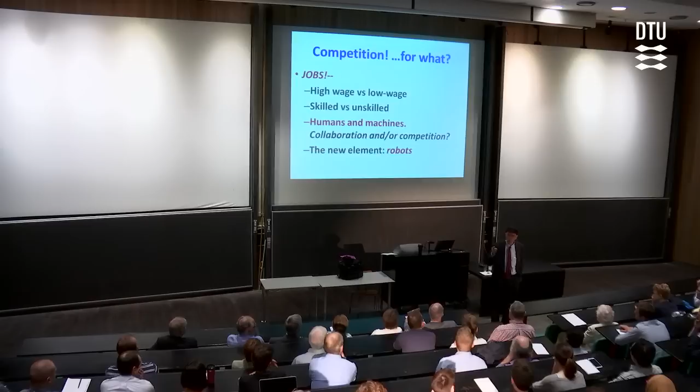And so the new element in this is robots. Robots are not just machines that operate on an assembly line. We humans are in the process of constructing a peer competitor, which is robots, machines able to do things that we can't do with artificial intelligence systems. They may look at us as meat-based intelligence systems and inferior in that way, but artificial intelligence systems may be at least as competent as we are in many of the things that we do. So it's an interesting problem.

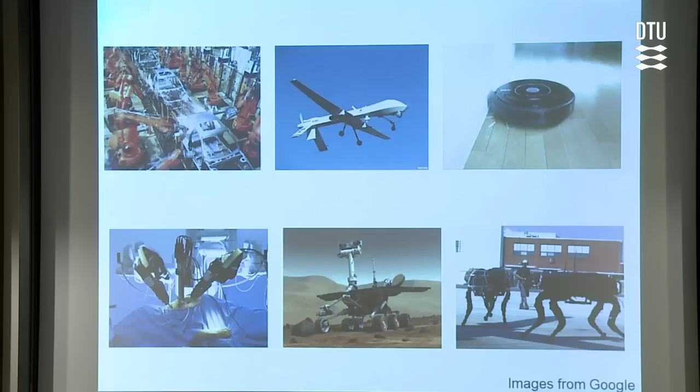Here are robots, and you're familiar with all of these in one fashion or another. There are just a couple of points I want to make about them. This is an assembly line, and these are robots involved in the assembly. The characteristic of these systems is that you cannot come anywhere near them. There's a fence you don't see around this, but when one of these arms swings, it's accustomed to holding an automobile, and if you happen to be in the way, it goes through you as if you weren't there and doesn't even notice. So these are decidedly not collaborative.

The military has, of course, been very good at drones, and a drone is just an airborne robot. This is an effort to make a consumer robot, the so-called Roomba, which is an exceedingly stupid and inefficient way of trying to sweep the floor. This is a picture of the so-called Da Vinci surgical robot, which may or may not give better surgery, but it certainly enables higher billing. So it's a good thing in a capitalist universe.

This is a robot which is of entirely legitimate use. Human beings cannot presently go here, and I'm going to show you a little bit more about the equivalent of this in just a second. But I want to make this point before we begin, and this has to do with the question of whether robots are intrinsically a bad idea.

I would point to early robots, otherwise known as machines, otherwise known as dishwashers and washing machines, which took half of the population, otherwise known as women, and released them from the task of washing dirty diapers and dirty dishes, and made them into teachers and CEOs and whatever they might be. So this was a case in which machines didn't compete but cooperated. They eliminated an unattractive job and replaced it with much more interesting and attractive jobs. So it can be good. It's a question of how you use these machines and how clever we are.

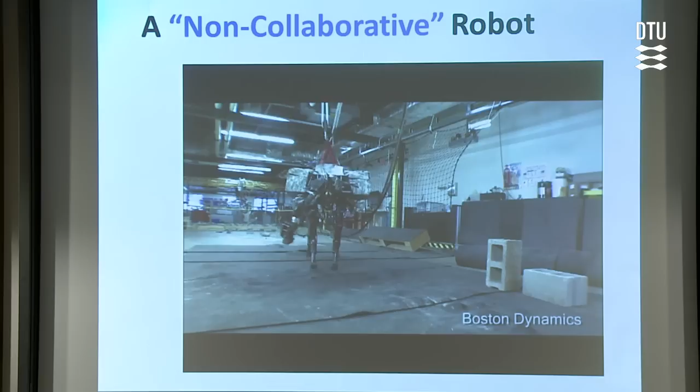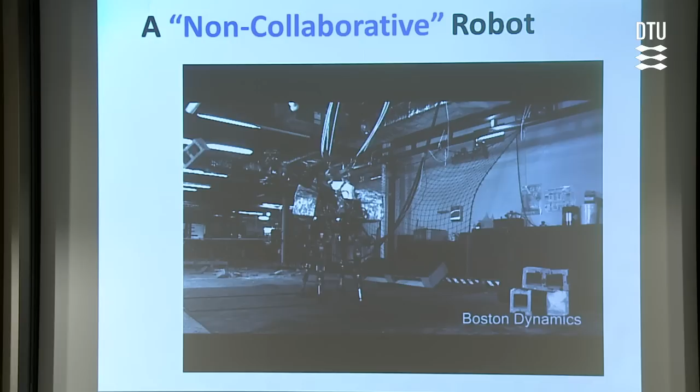But there's a point here that I want you to look at carefully. Look at the grace with which this thing balances, shifts its weight. It's just unbelievable. With my cataracts, I can't tell whether that's alive or not alive. It, in some ways, is better alive. But the underlying issue is that if you look at that kind of development, remember, that doesn't have a brain. All it has is a series of accelerometers and things of that kind. So without any control systems at all, other than the most primitive feedback loops, it does things that I can't tell are not something an animal does.

Now you take that and you couple it with artificial intelligence, and all of a sudden you begin to see a pathway to something, not next year, but something in the next 50 years that begins to look a lot like us. And there's a deep, really important underlying question here, which is, if a system becomes sufficiently complicated that it has the power of advanced information processors, the knowledge of the web, the ability to move autonomously, the ability in various ways to improve itself, it can arguably be set on a pathway for independent evolution. And I don't know whether this is going to happen, but I don't think it's just a question of trivial machines. It's more interesting than that.

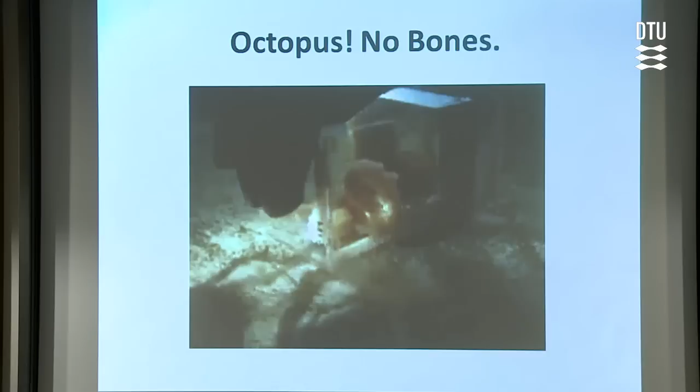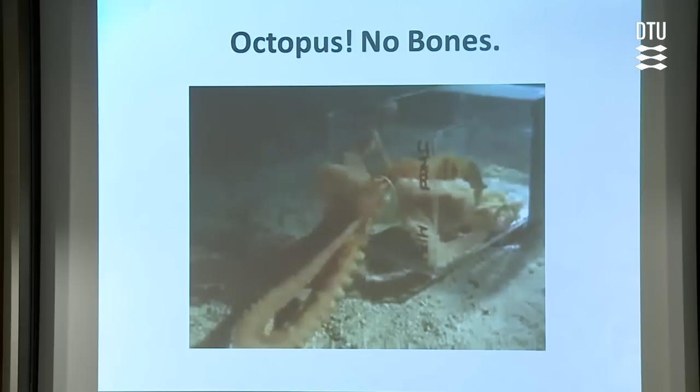Now, to do that, you need always a model, and here is our model. I just think this is among the most fabulous of organisms. This is an octopus, and this octopus is, as you can see, squeezing through a hole much smaller than the octopus, including squeezing its brain, which is apparently pretty plastic.

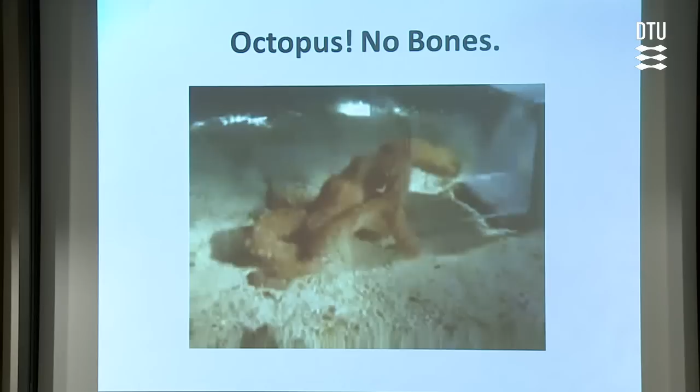I would note that we couldn't do any of that, or at least not without severe damage. So here's something that can do something that we can't do. And once it does it, finally, it's there. Look at that look of intense self-satisfaction.

But this is a model. The point is that the reason I have a skeleton and stuff like this is that I'm designed to withstand the forces of a gravitational field. An octopus doesn't need that because there's effectively no gravity if you're at buoyant density. But there's no real reason why I need that, except for the fact that this was an evolutionary solution. It could be done in other ways.

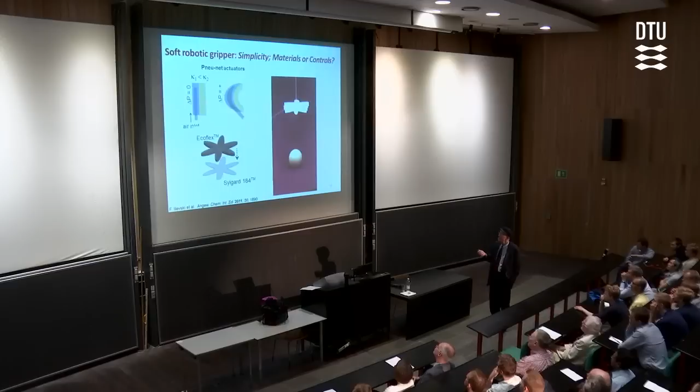And the technology itself is as simple as it could possibly be. It's simply, effectively, a balloon over here, an elastomer with an empty chamber on the inside. You pressurize it, and if there is a layer here that has the characteristic that it can bend but not stretch, as this expands in volume, it causes that to bend. A really trivial idea.

We make this in a straightforward process that I'll show you in a moment. But what's neat is you just pick up this string and lower it, the input line for pneumatic pressure. When this thing wraps itself around, it's very hard to get a hard robot to do it, because you'd need sensors telling you that you're not breaking the crush strength of the shell. But here, because the pressure is distributed uniformly across all the contact area, all you have to do is regulate one pressure, the input pressure, and you're done.

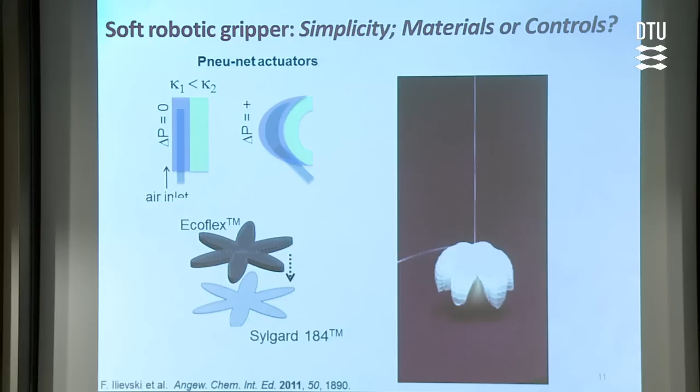It's a first step in something really interesting here, which is that it uses the properties of materials and design to replace complex sensors, feedback loops, and controllers. So it's a device which simplifies the technology.

So how do we make it? A lot of this came out of our work in microfluidics. What we do is simply design a mold, which in our case usually contains a number of small chambers, little bubbles, for a variety of reasons. We print it using a 3D printer. This might take a day for a complex mold.

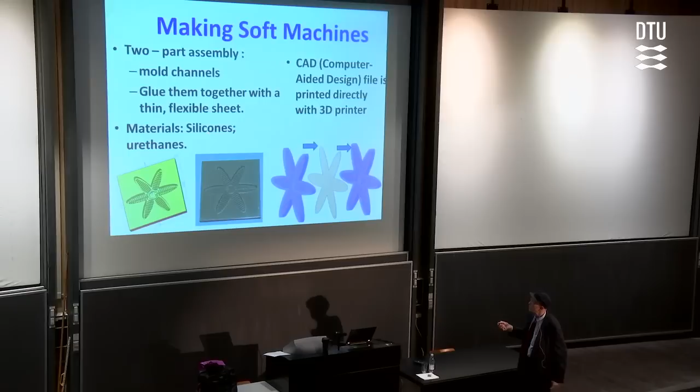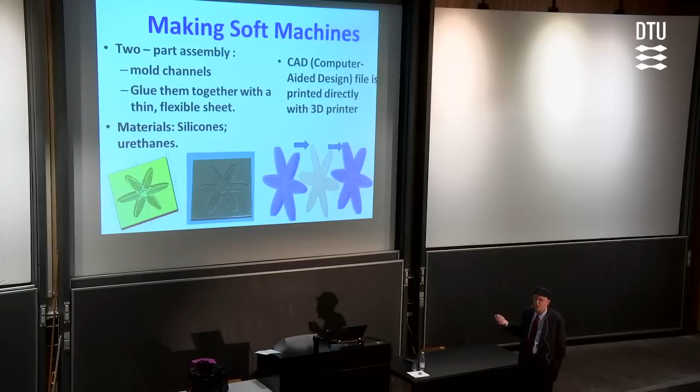But then we mold a flexible silicone rubber against that. We put in some kind of layer that gives us the mechanical properties we want. We glue these together with a bottom on it, and it's done. So it takes essentially no brains to do it. We like things with no brains.

I'm going to come back to that, but I just want to give you a hint of something. First, as this gripper blows up, you can see the little chambers that represent the arm here. But the other thing to look at, something we'll return to, is it starts to curl up from the end even though the pressure is uniform throughout the system. And why does that happen? There's some actually very interesting science associated with that.

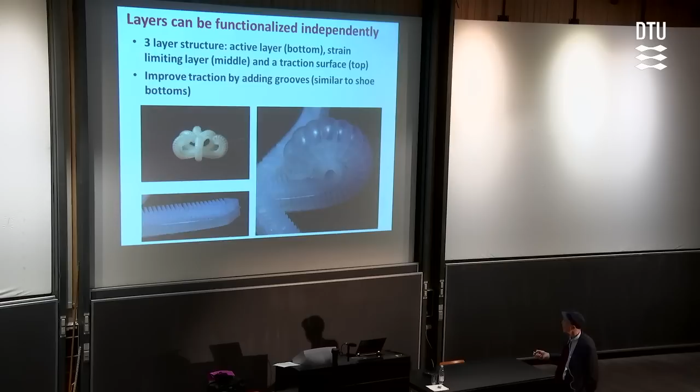It's also easy to take these things and mold internal structures that improve adhesion if you want to do that. It's a very flexible technology.

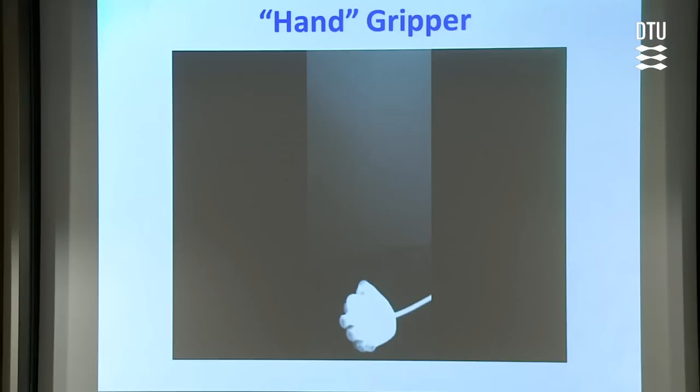Now there are other things that make it interesting, and here's one. This is a related structure, same kind of thing, but now in the shape of a hand. It comes down and grips the egg, and we've made this a little more complicated in terms of internal structure. You can see the fingers are almost articulated, with a joint-like activity. It puts the egg down without crushing it, and that's all fine. It gets its finger stuck there, but not to worry about.

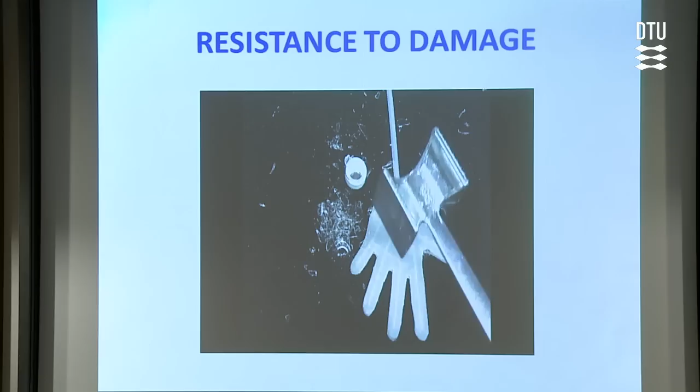But here's the thing that's more interesting—this differentiates it from hard robots. That's a mallet. Ouch. You pound on it, and this would break a small robot of that sort, just to give you a sense that this is real. After you do that, it works just fine. In fact, these are sufficiently light that you can throw them off an arbitrary building, and it doesn't make any difference—they're undamaged. They never reach a velocity that will cause impact damage. So they're essentially unbreakable to most blunt trauma.

They can be cut without much trouble. Hard robots can't be cut, but they're very easily damaged by blunt trauma, unlike these light ones.

And then you can make a whole bunch of other things. Here's something which is a millipede-like object, and here's an example for those of you who like problems—we do this by pressurizing each one of these in turn. How would you make this all work with just one input here? The answer is we don't know right now.

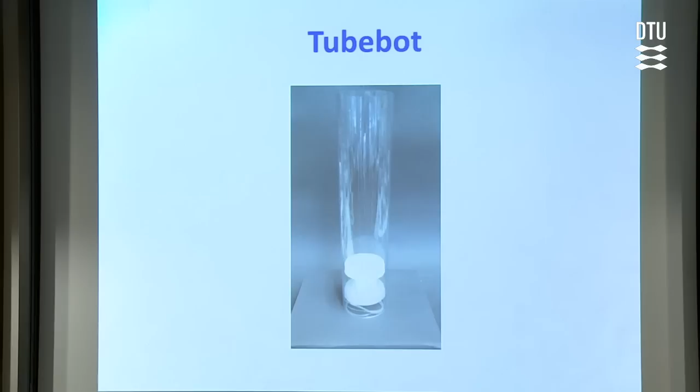Here's another device which enables you to crawl up the inside of a tube, if you want to crawl up the inside of a tube. Perhaps you don't want to, but this is doubtless useful for something—there are people already trying to think about using these to clean out sewers and pipelines and things like that.

Now these are all widgets which are pretty interesting. I want to talk about one bit of mechanics here, involving two components. One is what's called snap-through, which is a bistability—you see that in the little things kids have, a sort of bubble shape you push on and it pops through to the other side. Both are stable, but metastable in either phase. So I want to briefly talk about snap-through and then also about beam buckling. This is much more sophisticated and quite interesting, actually. It's got the mechanics people all excited.

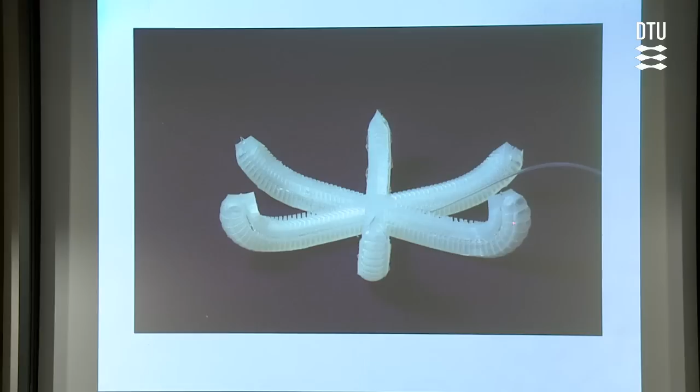So what's going on here? This is an example of snap-through. As you pressurize this structure, the pieces at the end expand all the way before the ones in here do. So you have a system in which you pressurize this entire arm, but because of an instability in the system, the pressurization here leads to curling before the system here curls.

This is, again, an example of using design and materials to get around the problems you'd have with conventional controllers, because trying to achieve a motion of that complexity with electric motors and reels and things of this sort would be a major problem. Here it's just a trivial outcome of the basic design. And all of this, incidentally, you can vary by changing the mechanical properties of the structure and the pneumatic chambers and things of that kind.

Now here's an example of beam buckling. And this was apparently—you can see over here—a heavy lift crane, which I'd suspect somebody got a little more ambitious than they should and picked up something which caused it to buckle at that point.

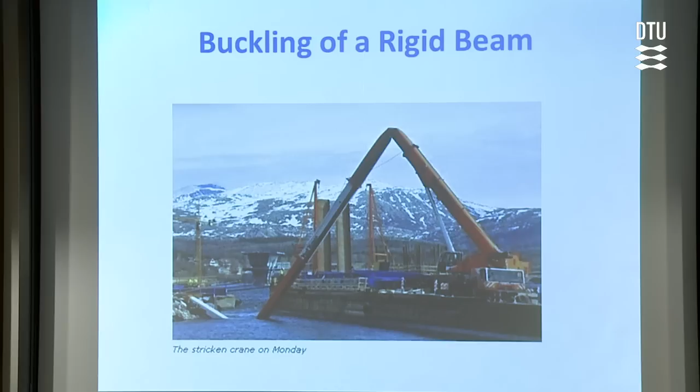What's characteristic of this with a rigid material is once it's buckled, it's failed. You see this in concrete pillars. You push and you push and you push and nothing happens, and then it buckles. And when it's buckled, it's failed.

With elastomers, that doesn't happen. So what we can do now is build structures of this sort. I want you to look at this as having two components. What you see is not two circles, but two ellipses. This and this are the same, this and this are the same. Think about these as being soft beams.

What's going to happen is the following: I'm going to contract them by applying vacuum here. As I apply vacuum, these chambers will shrink. This is an empty space with a thin membrane of PDMS on top of it. As it shrinks, this beam will buckle, but it will buckle reversibly. And amazingly, this internal piece here will rotate. Now, I don't know what's going to happen when I do that.

So let me go back and find this on my computer.

So what you're seeing here is a rotary motion. I've converted the linear motion I showed in other things into a rotary motion. You can begin to do all kinds of interesting things with this.

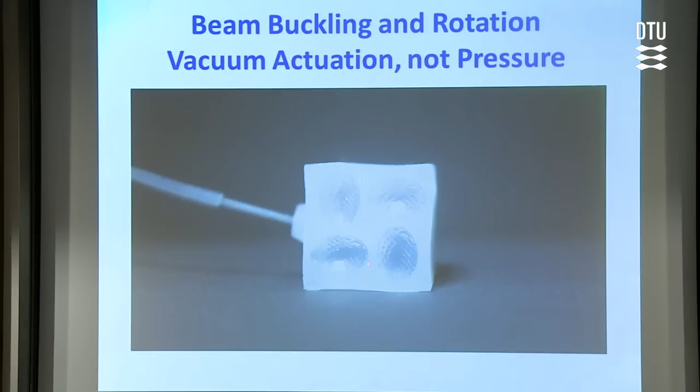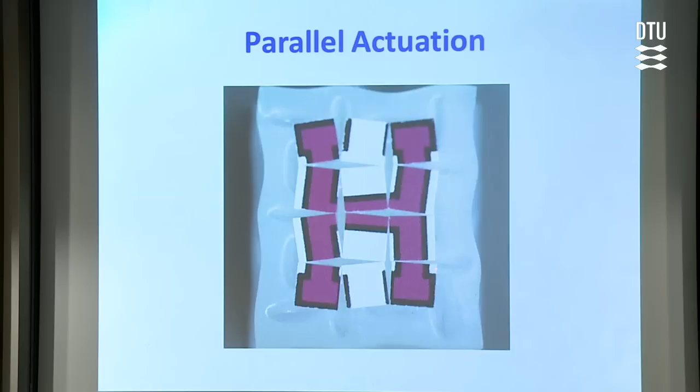I'll show you one here. This is a single input, a single source of vacuum, leading to massively parallel motion, which in this case orients a bunch of disks or plaques. This would be very hard to do in a system as simple as this one if it were hard. So by this kind of beam buckling, it's possible to get to some very interesting structures.

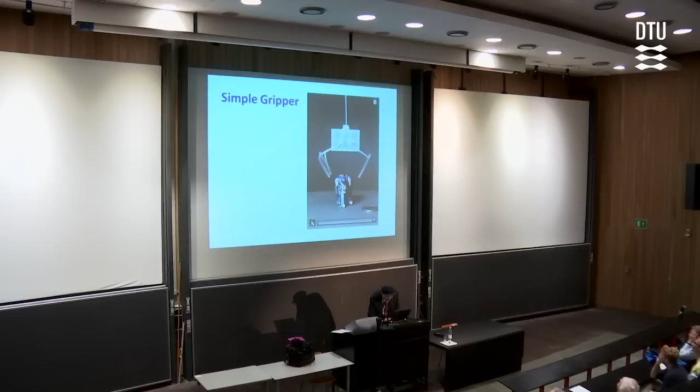Here's another one that again requires this. The reason for pausing on this is that this part is going to rotate in that direction, and this part is going to rotate in that direction, because of the symmetry of this series of holes here with ellipses of different orientation.

And when you do that, with a single vacuum input, this happens: it collapses, grabs, and picks up. So, quite a sophisticated motion for just one pressure.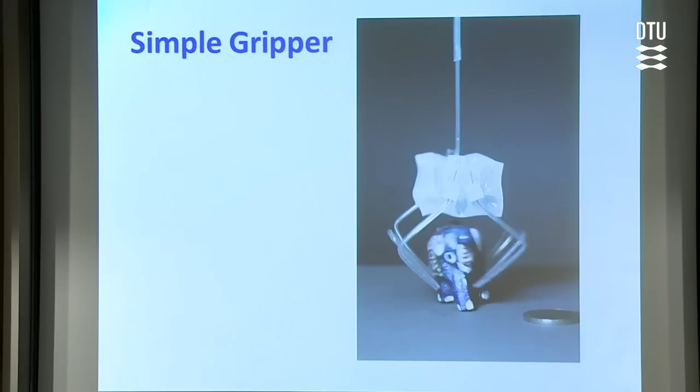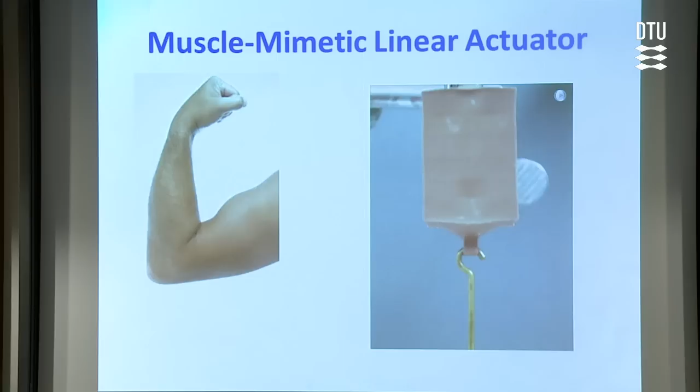So it's intrinsically safe. Now, here's muscle. What I'm going to show you here is our muscle equivalent. I'm really very happy with this kind of thing. You can see the structure — it's the same kind of structure I showed you under negative pressure, that is, vacuum. As the chambers collapse, it contracts this way, but not that way. It's designed for this kind of anisotropic motion.

And here it goes, if I can find my cursor. Where is my cursor? Here we are. So I apply a vacuum, and it lifts a big weight. It does about the same thing that a muscle does at the same volume.

If you pause for a second and look at the structures here — I should have that loop, but that's okay — what they are is a series of beams that are again buckling. The beam connection may be a little unclear, but it can be considered an ensemble of buckling beams.

Now, some examples. This is Josh Lessing's arm with a volleyball, and that's Josh Lessing doing his thing with a volleyball. This is our arm, which does its thing. It's a little slower, but only because on this particular piece we had a thin piece of tubing. And to show it's just a step from here to the Appassionata, it can do a flip.

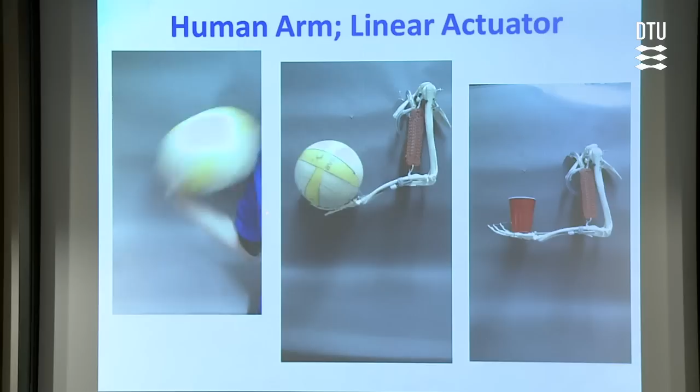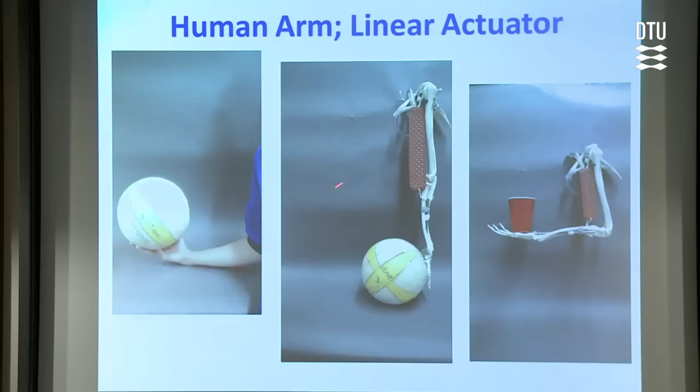Now, applications. I'm a big believer that applications focus the mind, so I'm going to talk about four. One is to show you some work done by a company called Soft Robotics, which was founded on this basis. I want to make a remark about this.

Let me show you the other examples first. I'm going to talk about some further biomimetic structures. I'm going to talk about a topic we're very interested in called 'life that never was'—if you look around, there are certain kinds of motions that creatures use to move, but you could imagine many others, and why aren't they used? It's now easy enough to make models of things so we can examine why some of these alternatives weren't used. The last one is some examples in biomedicine. Let me pause to comment on the first one.

My good friend and ex-student, David Walt, was one of the founders of a company called Illumina. Those of you who are biologists will have heard of Illumina. Illumina makes most of the boxes used for gene sequencing—80% of gene sequencing is done with Illumina sequencers.

I was at a meeting once, and a student raised her hand and said, 'Professor Walt, we know you continue to work on this, and that you're also doing things with proteins—how do you avoid the conflict of interest in your laboratory by having both a company and a laboratory activity?' He said, 'There's no problem.' He's absolutely right. The reason, he says, is that as soon as you hand one of these problems to a company with mature professional engineers, you can never keep up in university. You can't possibly do as well as they do, so you don't bother—when you hand it over, you quit and go do something else with your life.

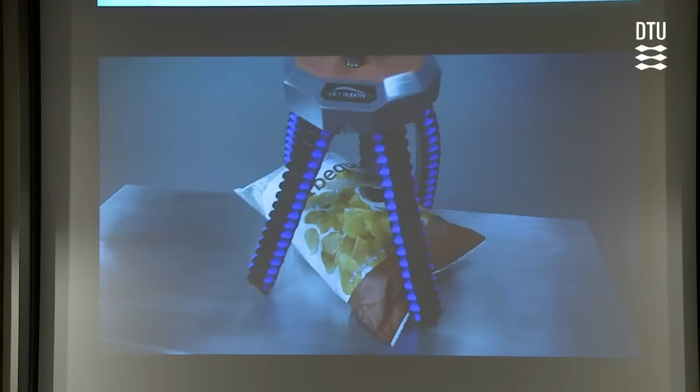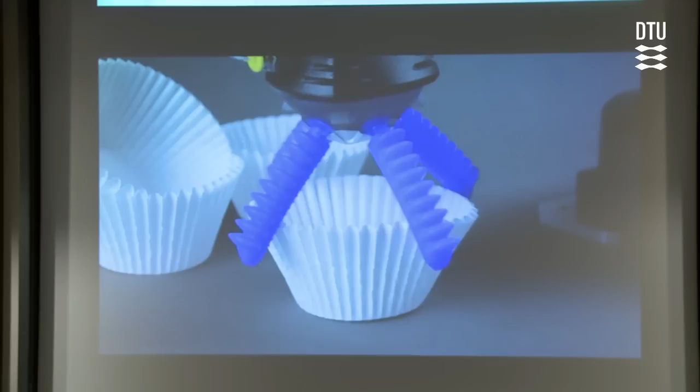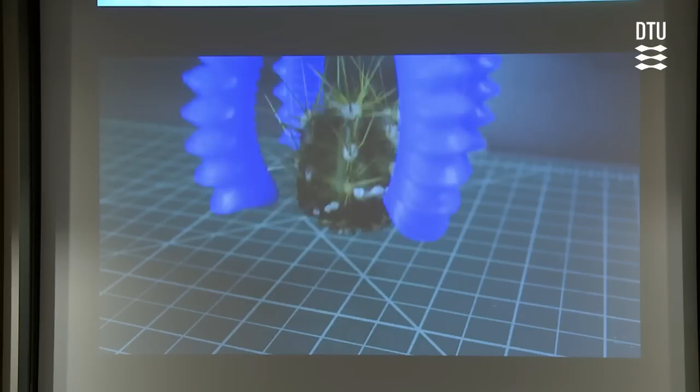Here is a soft robotics gripper picking up a pumpkin. Here is a soft robotics gripper picking up potato chips—very hard to do with hard robots, because they either crush the chips or don't have the strength to pick up the other thing. This is fruit picking, addressing the difficulties of being a farm worker—here it's picking up a very fragile object. And then the everyday task, which we all experience, of picking up a cactus and putting it down. I won't ask how many of you do that every morning.

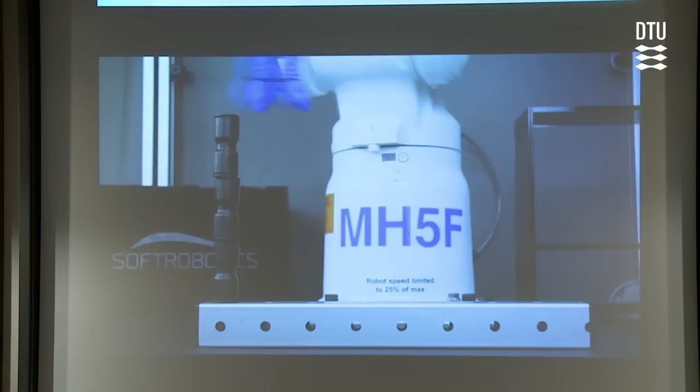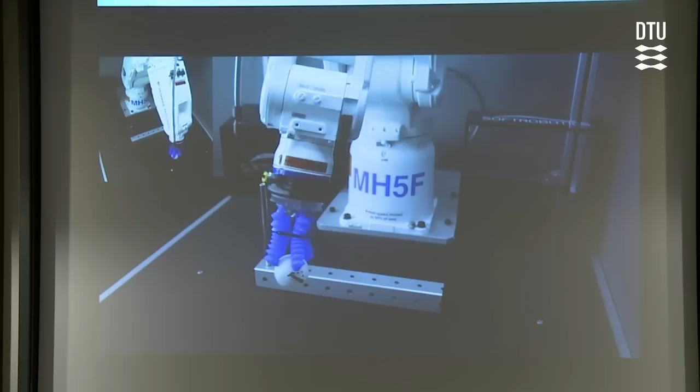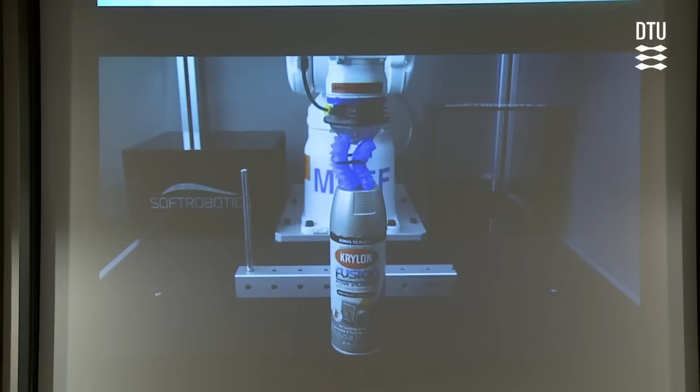Here are some agility tests—notice this is positioned on the end of a hard robot, and I think this will be the major use at the beginning. This is something I actually quite like, and I'm told it only took 4 or 5 tries to catch the ball—but it's really not an easy thing to do with a hard robot. Here's another thing that's quite hard to do with hard robots but really easy here. Notice the 3 fingers—you just pop it off because it's a magnetic coupling, and put on 4. That's critically important for industrial applications, because end effectors get changed out all the time on these arms.

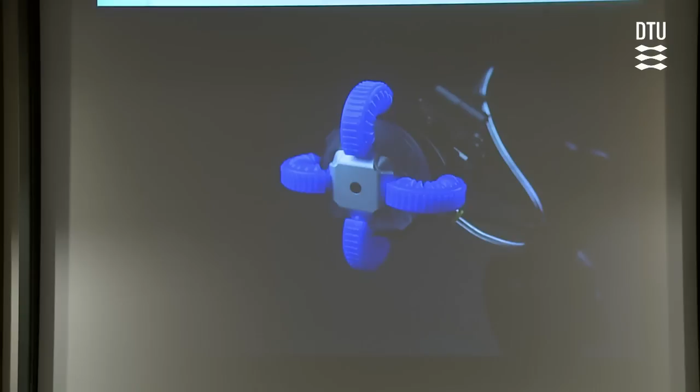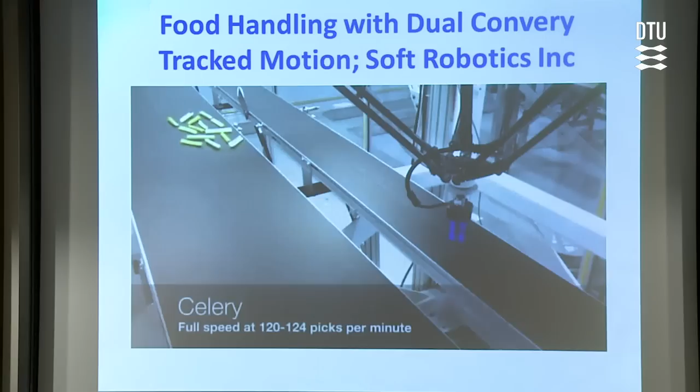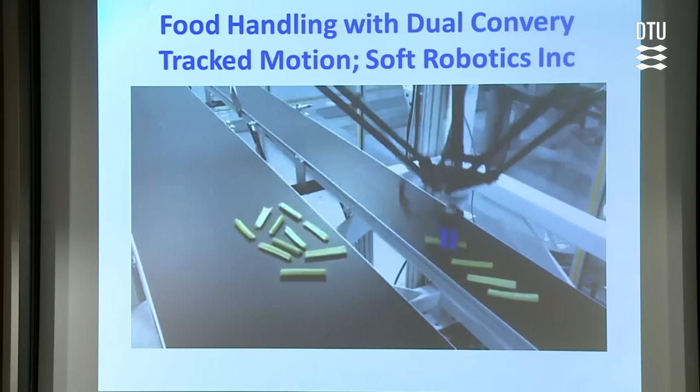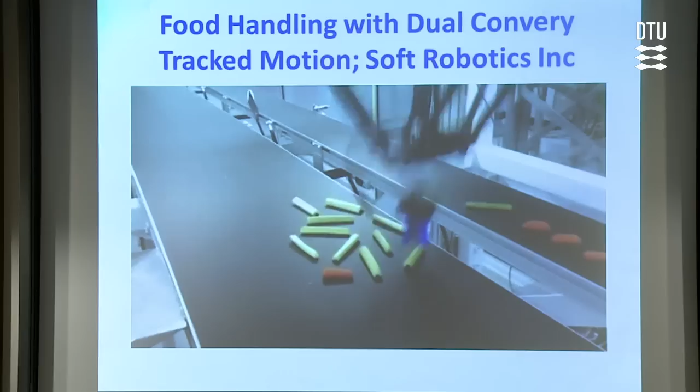Here's another example using one of your next-door neighbor's devices—you can watch this thing move, it's really quite good. Here's celery, this is real speed, real time, and here it goes. The gripper adapts to the different shapes of the celery almost effortlessly because it's a soft gripper, so you don't need controls that watch everything in detail. You combine pre-existing vision systems with this amazing tripodal arm to achieve this kind of motion.

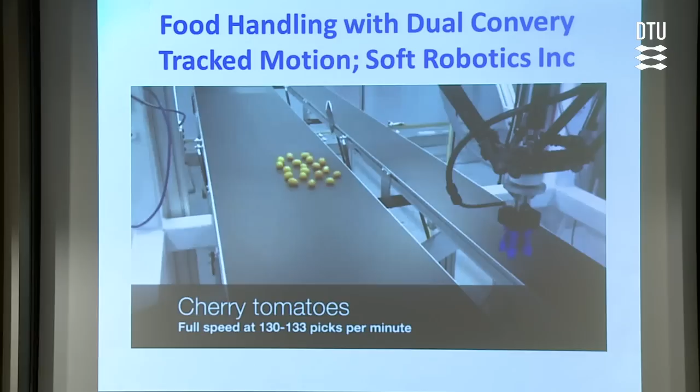And why do you do this? The answer is that, although you don't think of yourself this way, you are filthy.

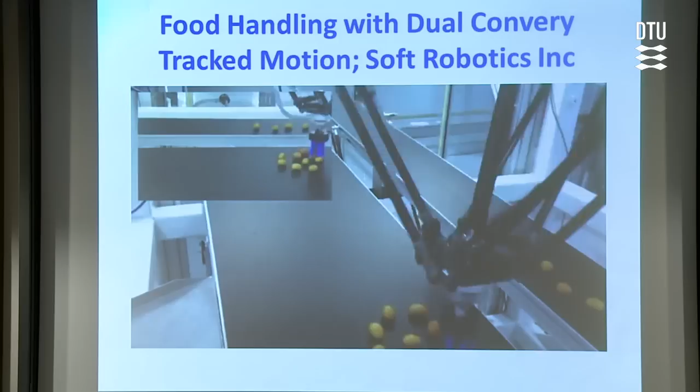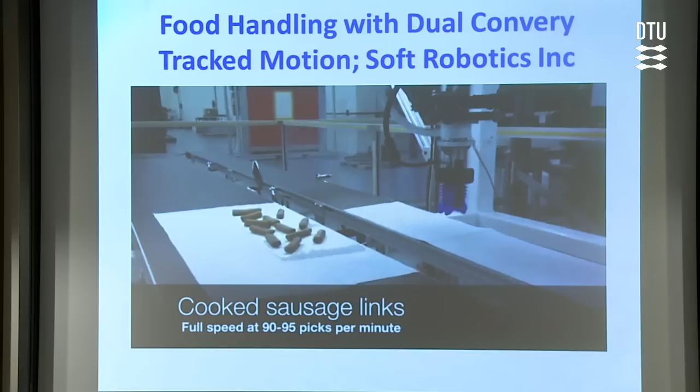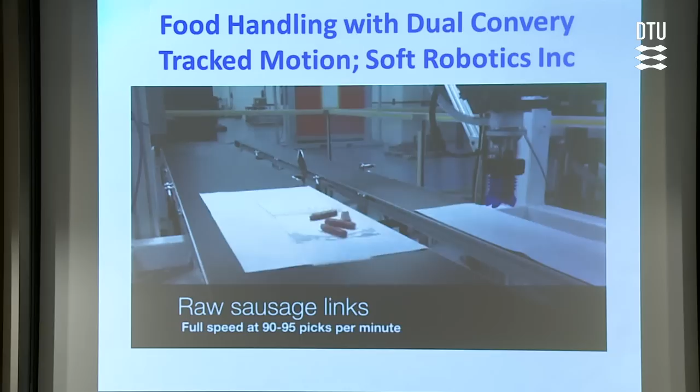If you're in an industrial food processing line, you may feel you just have a minor cold, but actually it's the beginning of a norovirus infection, at which point 100 people get sick because you're just there, and the company involved loses 25% of its revenue for one quarter from that sector of the United States. So there's a very deep interest in the food processing industry to get people completely out of industrial food processing lines. This solves one of the problems in that it's flexible enough to pick up food which has variable mechanical strength, variable shape, variable size. It's just easy because it's pneumatic.

What the spider does is pressurize the structure on the inside and expand it. So this is a basic force diagram for a spider joint, and we do the same thing using a rigid axial structure. We put in a little tension element, an elastomeric tendon, and then here we have basically a balloon, and you'll see in a moment this works quite nicely.

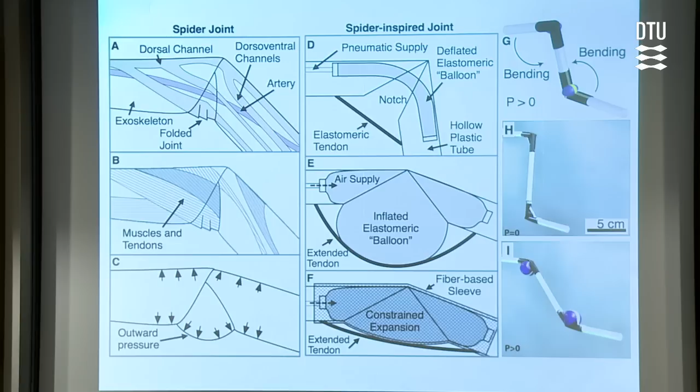I'd also say that the basic sophisticated structural elements we use for these polymers are the same straws you use for drinking soda. So it's cheap, it's really wonderful, and it's a circular cylinder beam, so they're very satisfactory.

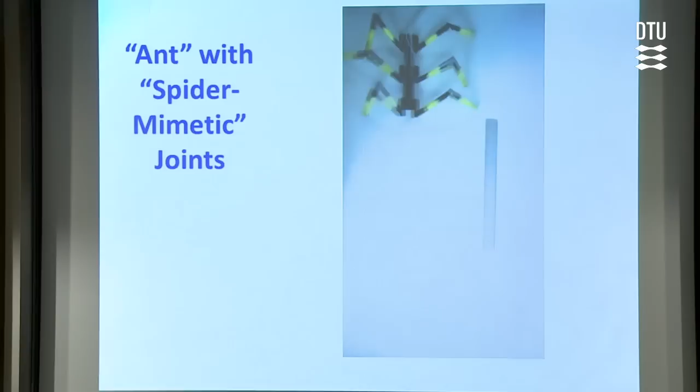So here is an ant. It happens to have spider legs, but notice the way the leg moves - at any point there are 3 feet on the ground. It moves as a series of 2 triangles, and it's actually a very sophisticated motion which enables the thing to maintain stability over a wide variety of rough terrains. We haven't spent that much time working on rough terrains, but here it is galloping uphill. So that's an example of a biomimetic structure.

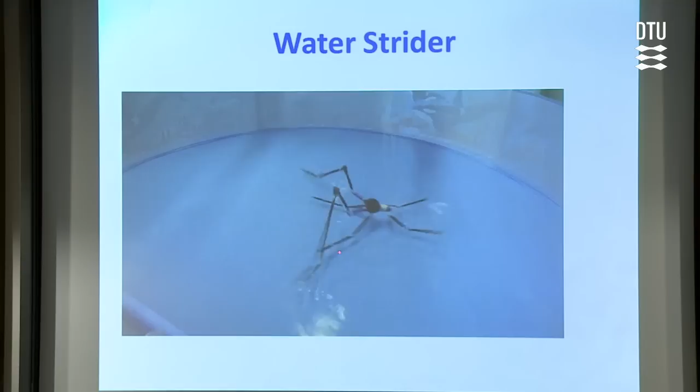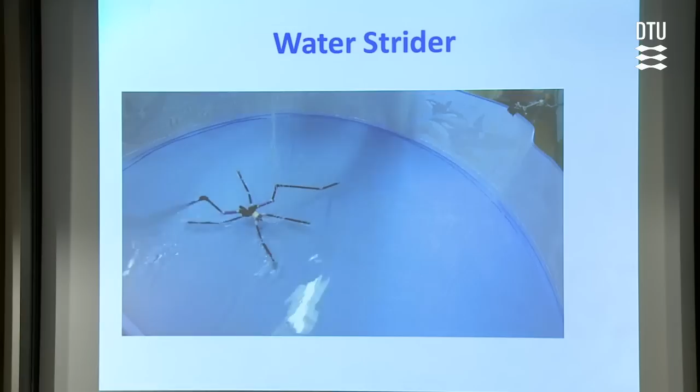Here's another biomimetic structure. This is a water strider. A water strider uses 4 of its legs to maintain balance and 2 of its legs to scull. One of the characteristics of a water strider is it has to be light enough that it will stand on the surface of the water held up by surface tension. So, does the world care about another water strider? I don't, but I thought it was a nice demo.

This is actually a pretty interesting device. It's just an incompressible disc, and here we put a balloon. As the balloon expands, it causes the disc to buckle, and this nonlinear buckling motion, combined with legs, provides actually pretty good motion.

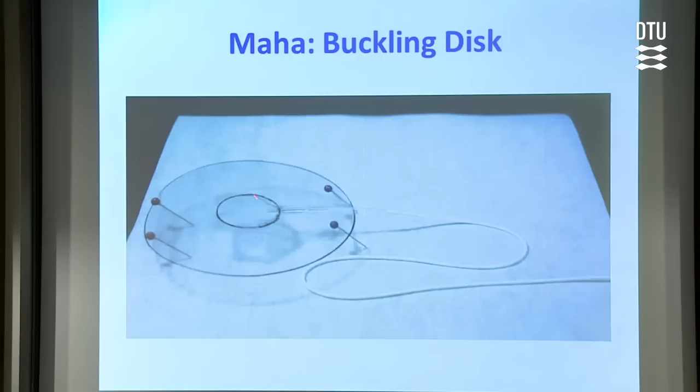And if you have 2 of these - I couldn't find the video - but if you have 2 of these, you can steer it quite well. So this is a perfectly practical way of doing things. Why this didn't occur during the Cambrian explosion, I don't know, but it doesn't seem to.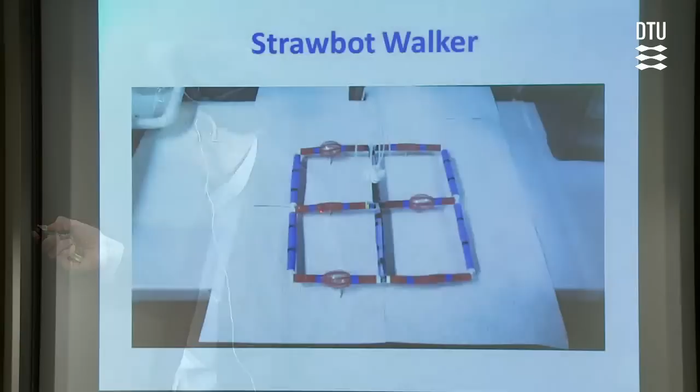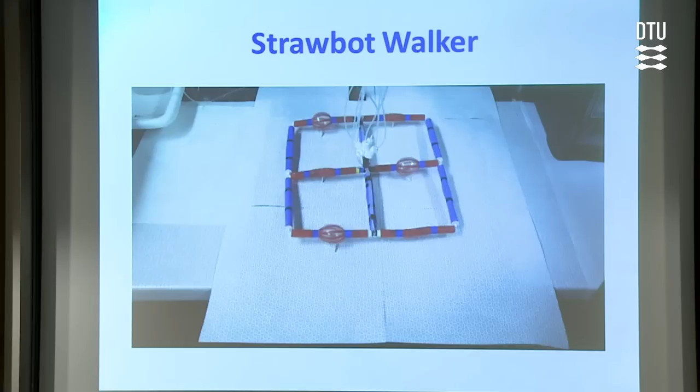If you look at this carefully, each one of these, as it expands - because there are rigid slits - the balloon expands but it rotates. Because it's again the ant-like construction of 3 and 3, it manages to make its way forward. This must be among the least agile and beautiful walkers you've ever seen, but nonetheless it works just fine. So you can explore these kinds of ideas.

And then the final thing is actually important—probably as important as the food handling and mechanics. The application for that first thing I showed you, picking up potato chips and pumpkins and things of this kind, why would you ever want to do that? The answer is you want to do that if you're working for Amazon, where people go online and buy potato chips, 5-kilo cans of lube oil, and sweaters in slippery plastic bags. The idea is to replace people who do one of the world's most horrible jobs, which is packing boxes for Amazon.

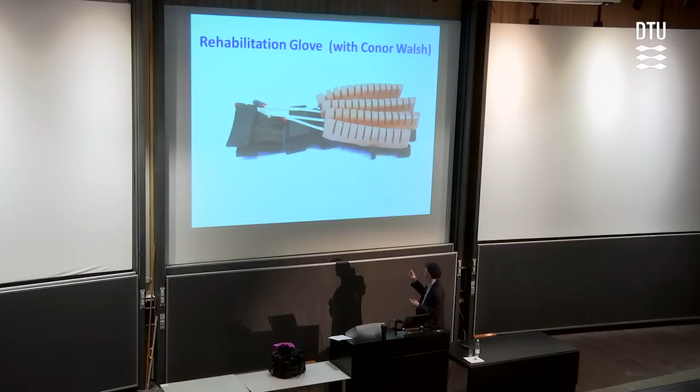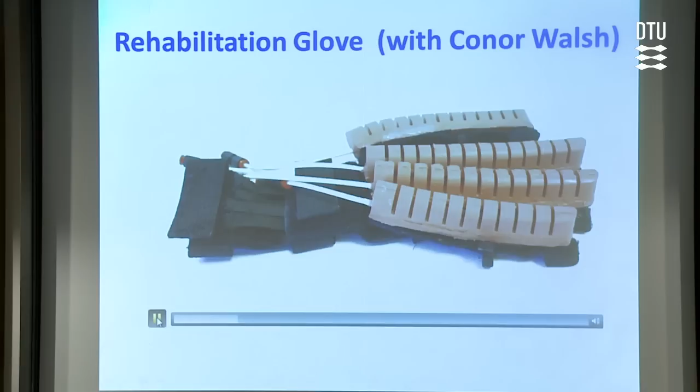So here's an example of a system that will probably go into development soon because it works. What we have here is just a glove you buy from Sears and Roebuck, and we've put a simple bender on the outside that connects to a pressure source. It could be done with a vacuum source if you want to do it differently. So you can see it moves the fingers.

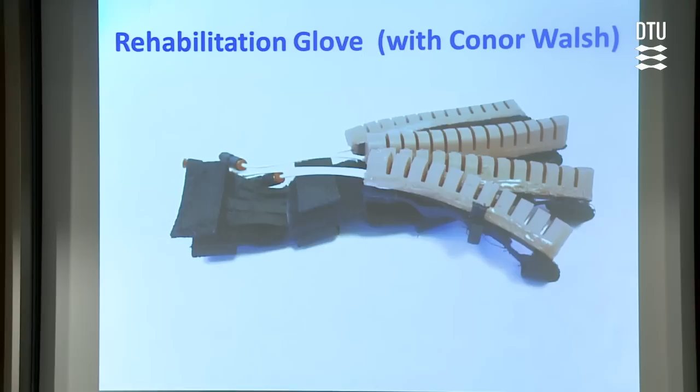Why do you care? An example of the use of this kind of thing is as an aid to nurses. Surgeons get all kinds of care, but nurses don't get so much, even though they really run much of the medical system. One of the things you have to do as a nurse: a patient comes into a rehab unit after having a stroke, and the stroke affects a hand. It's critically important that the hand be manipulated to begin returning it to motion. Otherwise you develop something called spasticity, where everything freezes in place and you can't get it going again, no matter what you do. So it's really important to do, but also not very interesting to sit there and help somebody move their hand.

This is a fine solution for that kind of problem, because you can arrange the pressure and timing to be anything you want. It's more convenient for the patient, more convenient for the nurse—probably just a better deal all around.

You can take this a step further, because these are going to be, I think, very useful as assist devices. If you've had a stroke, you may recover some motion but not all of it, and you'd like something that gives you a little more strength to pick up an apple or a cup or whatever. This provides that very gently—just a little extra strength to hold onto things. All it requires is a small compressor on a belt and some batteries. So I think there are going to be lots of very useful uses of this kind of thing.

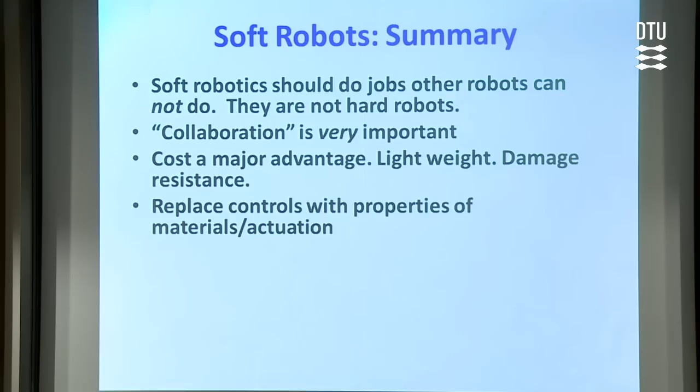They're damage resistant. They're complementary kinds of things. It's different systems in different ways. A very interesting issue is that if you look at hard robotic systems, a lot of their cost is the control systems, and there will be applications with soft systems in which you also have to have controllers. But as I showed you, you can get conformal gripping of an irregular shaped thing, an apple or whatever it might be, with no controllers at all. You just have one pressure controller, and the materials do all the rest. I think that's very interesting.

I really believe that applications and products focus the mind. So surgery and rehab and prostheses we've talked about, agriculture, both food picking and food handling. I haven't talked about search and rescue, but I'll touch on that in just a moment.

Single use - you send a robot into Fukushima to have a look around and see what's going on. By the time it's been there, it's so radioactive that you don't want to get it back. But you can't afford to send a stream of $50,000 robots in and throw them away. These, it makes no difference - you couldn't care less, you could make them for $50. Hazardous tasks, all of these kinds of things, I think are legitimate applications for soft robotics.

Now, a couple of other things. One question is always, what next? Everything that I've showed you up to this point has involved rubber with the same general sort of elastic properties as rubber bands. We don't actually use rubber bands because they oxidize. But PDMS is an elastomer, and you can get pretty good elastomeric strains on it.